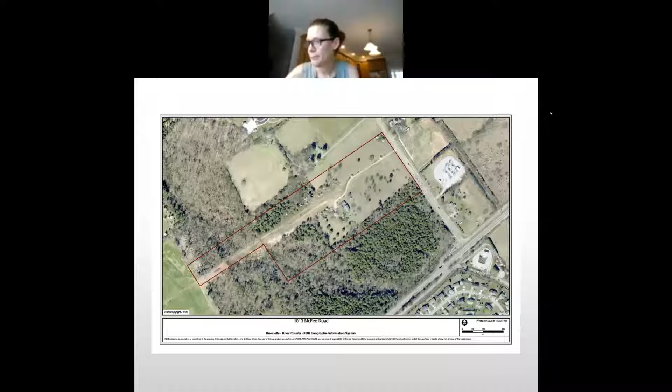Okay, anyone else have anything they want to add? Yeah, who's the developer?

It's a Homestead Land Holding. It's the same people I always work for. The only people I work for. Okay, Russ, thank you. Yeah.

Anyone else? We still have about 15 minutes if anybody has anything else to add at this point.

Mark, I'll just ask, do you anticipate a change in protocol as it relates to the physical planning commission meeting in 2 weeks? Is it still going to be virtual, or how are y'all handling the state and the county current situation regarding that?

Yeah, I'm not sure, Russ. I'll have to check on that. I don't know the answer to that at this point.

Okay. Hey, Russ, this is David Smoke. I think we just got some information that the governor may be extending his executive order to allow us to do virtual meetings a little while longer, especially since the county has still a rule in place through the end of the month to not have more than 10 people meet at a time. So I think if he extends that order, we most likely would have a virtual meeting again. However, if he doesn't, then we'll have to figure out what to do. So hopefully by next week, we'll get some guidance on that.

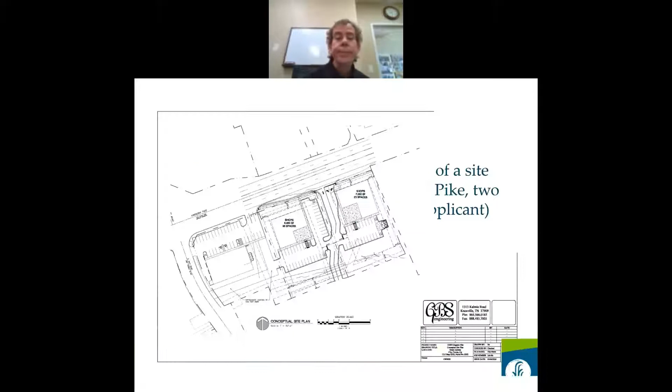Okay, let's go ahead and get started on this item. This is basically a request to, first of all, if anybody is on, please mute yourself unless you need to say something, then unmute yourself so we don't get feedback.

This property is just east of South Watt Road, Kingston Pike, east of the Dixie Lee Liquor Store, and just north of the Icearium. The applicants basically want to get some very preliminary feedback on a rough concept of two 1-acre Waller properties that they're looking to develop into a couple of small shop buildings, retail or office.

The particular request you see on the screen—a couple of things, and we've met with the applicant about this just to go over some of staff's thoughts. If the access ends up where they're proposing it, they will have to request a variance from the driveways and other access ways ordinance, due to the proposed access not being more than 400 feet from other access points on Kingston Pike.

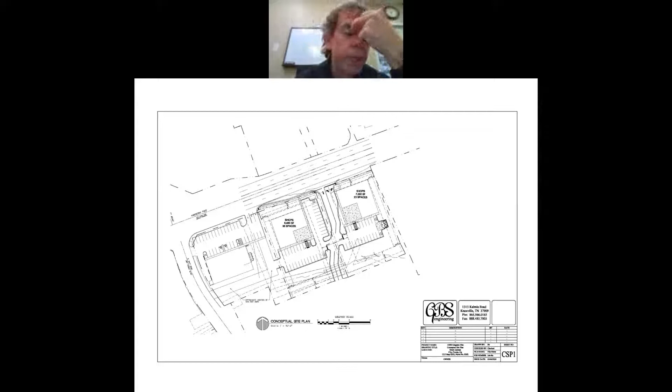So I'm trying to think if there's any other, some of the area around Dixie Lee Liquor is going to be reworked with the TDOT project. There's kind of a drainage swale just to the south of that building that'll be reworked, and the access way is going to be reworked. They're actually going to get rid of the existing curb cut onto South Watt Road on the north side of the Dixie Lee Liquor building, so that should improve that situation since it's so close to that intersection. It's not really an ideal place for an access.

I think that's the main discussion items, at least from staff's perspective. Obviously, we'd want to see sidewalk connections to all the properties to the south, east and west, and they do have a sidewalk shown along Kingston Pike that will connect to a sidewalk built as part of the TDOT project there at the intersection.

And so with that, does anybody have any initial thoughts here on this concept? The buildings are obviously up closer to the street, similar to what we see in some of the other developments to the east in the Renaissance area, for example.

Yeah, if anybody has any questions or comments, now's the time to bring them up. I think the applicants just want to get as much input as they can as early as possible, so they know what they need to be considering when this eventually goes to the planning commission.

Mark, it looks like that access point seems to be across the street from a potential access point of the property on the other side. Is that correct, Nick? Yes, that is correct.

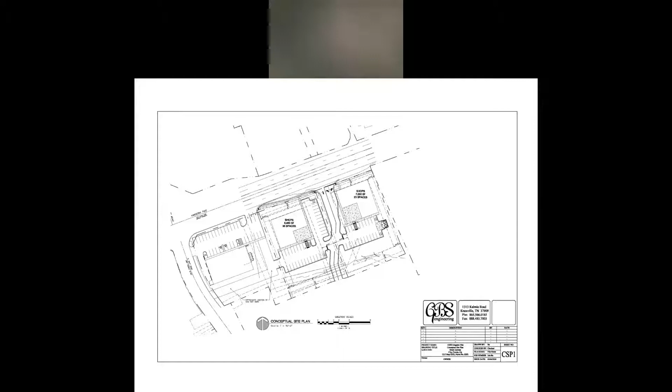Well, I think it's a smart move to line it with the property across the street. That's my opinion, that makes sense. I mean, that's why we did it. It just makes sense long term.

Nick, have you guys coordinated with Dixie Lee as well to have access to the rear of their parking lot? I don't know if they're going to be able to — they're not going to put parking back there, are they? No, and that's a very unique situation. But to answer your question directly, absolutely, we have a very good relationship with the Taylors. We have a very good relationship with the Wallers, who own the ground that Dixie Liquor is on. Now, what is very unique is that it's neither the property owner or the tenant that is making the improvement.

Mark, you're going to know a lot more about it than I, and maybe Daryl's on this call and he can explain it. But it's rather unique that the public sector is actually making the improvement on private property. It makes sense, it needs to be done. Again, it's one of those things nobody would have built it like that today, but that's the way it is.

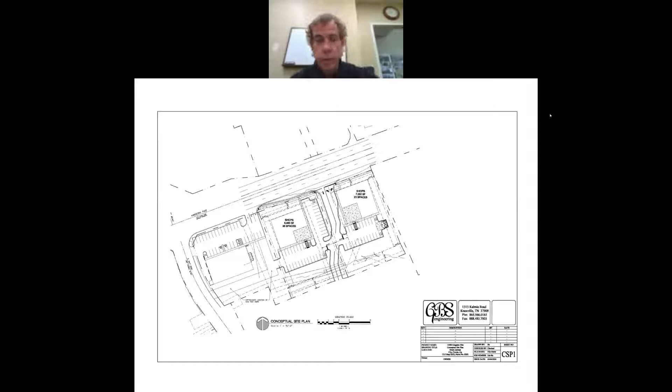Does anybody else have any comments, thoughts, or feedback at this point? This will just be workshopped at the May 21st meeting, but I just wanted to get some early feedback to see if it's doable, what they're proposing.

I do have something I would really like some feedback on, and Mark addressed it a little bit in the introduction. As you can see, we put a dumpster pad on the east end of the Eastern Building parking lot, and we totally support and agree it makes sense to have as much cross connectivity as you possibly can.

In this case, we did put the dumpster pad in a location that would, at least for now, restrict cross connectivity. The reason we chose that location is if you simply go out to the site and stand where you think the dumpster is going to be, which is pretty easy to do, you can see that to the east of us the topography probably falls 30 feet.

So what we're asking, what we would like to ask Planning Commission for, is to allow us to put the dumpster pad there today, and we will include a note, or however you guys want to do it, to make you feel comfortable that if the property next to us — or I should say when it is developed — we will use that as a cross connectivity location. But we think that is a very, very long time away.

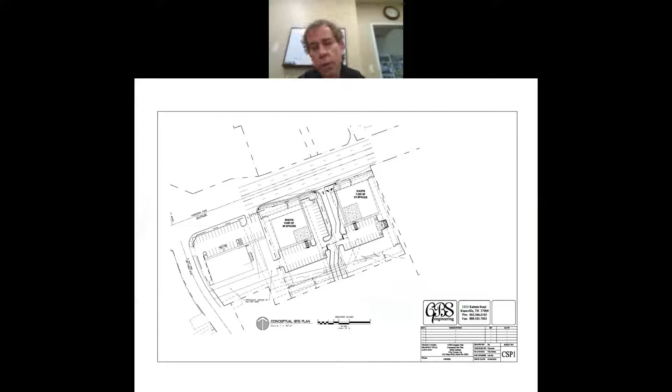Yeah, that's a good point, and certainly that would be an option to look at if Horn's property is developed. At this point with their project, it's more about getting into the design, but basically what I'd say with their concept is set it up so it doesn't preclude a connection from potentially happening at some future date, given whatever may happen to the property to the east. So we'd be looking at access easements that would be platted to the east, and actually to the west with the Dixie Liquor property, and I guess to the south too - cross-access private easements. But they just need to make sure they don't preclude that connection from happening, should all the conditions become favorable. But certainly the Icearium is another option - I would definitely look at that. I don't know what the challenges would be connecting the Horn property south to the Icearium property, but that's certainly something we could look at as well.

Nick, is the topography better at that point than connecting yours? Well, yes and no, probably, Ron. I haven't specifically spent time looking at the Icearium property connecting to Horns because we don't control either of those. So I don't know - none of them are going to be easy. They're all going to be expensive.

Hey Nick, I've got an idea. Since this is a workshop, Mark, can you go back to the drawing? As you turn in between those two properties and start back, you dogleg there to the west a little bit, right there at the corner of the east property - there's a little nook where it turns.

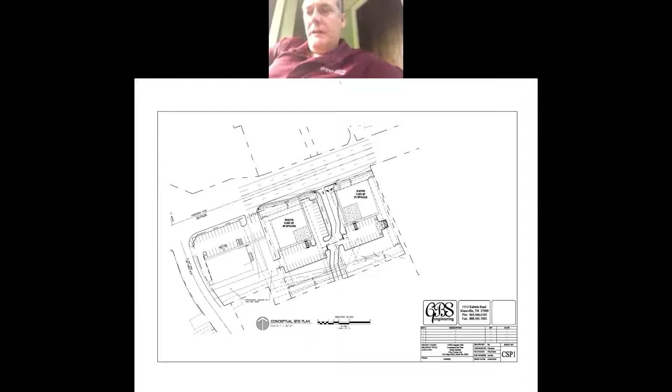If I can chime in, the rationale for putting it at the end of the parking lot is that when the trash truck is emptying the dumpster, he's not blocking the flow of traffic. The alternative location that I think Nick and Ron are talking about - the only downside is that when the trash truck is actually there servicing the dumpster, he's going to be blocking that drive that connects Kingston Pike back to the Cool Sports Icearium.

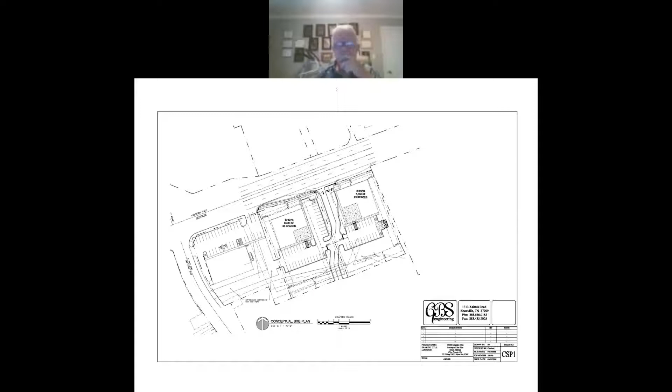I don't know if it's me, but I've lost the exhibit—I'm getting Trevor's photo instead. Am I the only one? It may be operator error here. I think that was me, I was trying to upload or send something. There we go—no, sorry. It just popped up. Okay, Nick, you had a drawing on something there with a little red section off the main drive. Is that where you guys are? You were able to see that? I couldn't tell if you could see it. Yeah, we can see it. Is that what you were proposing? Did you all see that before it disappeared? Yeah, I saw it. Can you go back, Nick, see if you can make that—are you doing that, or is Mark able to? I did that, but I honestly don't know how. It had a little note that said Nick is sharing content, and it showed a little red right off of the main road.

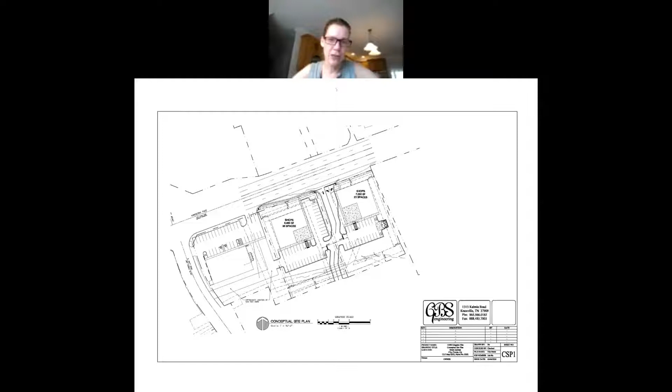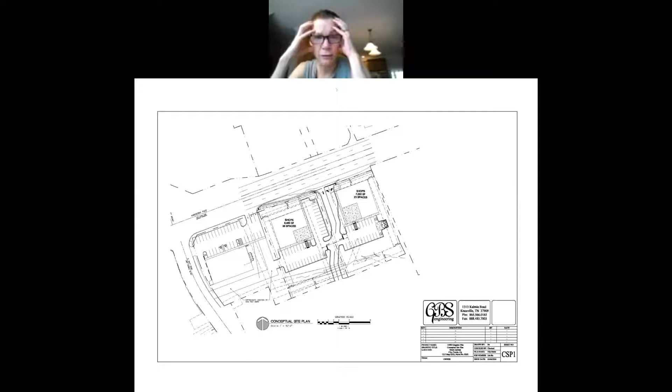So here's the question—typically I don't know when garbage people show up, whenever they want, but that's not what they're supposed to do. Here's the issue: you're in the main driveway there. You might disturb some people that park in that lot, but you're getting out of the main road when you put it in the corner where you have it placed right now. It looks kind of awkward for a garbage truck to get into that, unload it, and then back around and turn around. I think you're in a better position where you currently have it.

We do too. We went through—go ahead, Nick. I was just going to agree, obviously before we submit anything or let anybody else look at it, we go through revision after revision after revision, and we think that where we have proposed it, what you're looking at now, is the best alternative given the constraints that we have. I'm actually fine with this.

The cross-connection easement will be platted so that we're aware that in the future, if something happens on the Horn property, we can revisit locations.

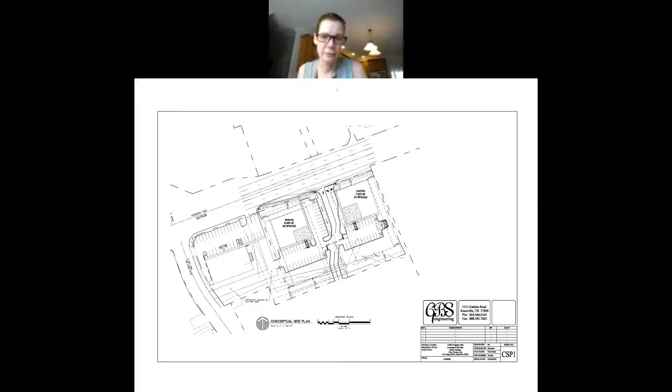By then we may have a new way of handling garbage, who knows. So I'm fine with how you guys have it situated right now. Dixie Liquor has their own dumpster enclosure on the west end. If Horn develops his, maybe this becomes a private partnership where we build one dumpster enclosure that accommodates a larger area instead of every site having its own. None of that takes place until that property is developed, and obviously we've got to deal with trash in the interim. So that's kind of why we proposed it the way we did.

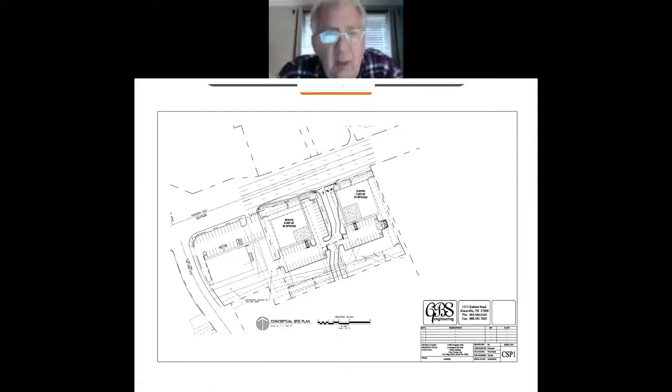This is Alderman Pinchok again. I've got a question, I can't read it, the printing is too small. What's the square footage of these two buildings, and will they be single tenants? Right now, the one on the west is 6,400 square feet. The one on the east is 7,000 square feet, somewhere close to that.

As far as the tenant makeup goes, your guess is as good as mine. I had a large office tenant tell me yesterday that half his staff is working from home and they're more productive than they've ever been. I took that as a shot over the bow that he's going to cut his space in half. If there's anything we've learned in the last month, it's that we don't have any idea what the future holds.

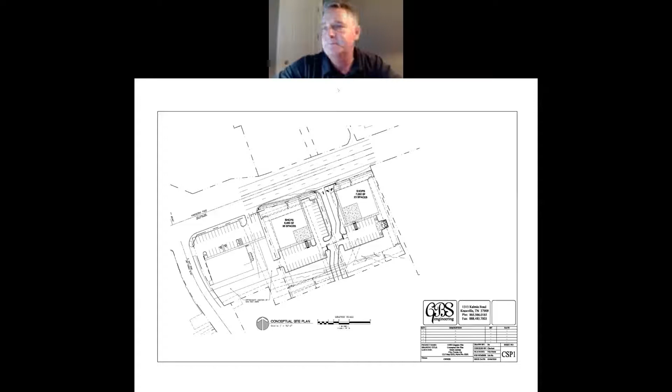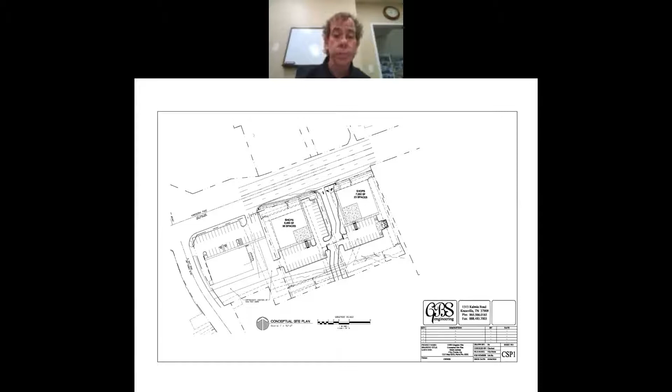Brandon is in on that. This item, if you remember a couple months ago, three months ago, there was some 5G fiber installation that came through the Planning Commission, not the small cell support structures, but the fiber, mostly underground fiber to support potentially those kinds of structures. Some areas were approved, and then the applicant subsequently wanted to come back and present some additional areas in generally the same portion of town, that North Campbell Station, Sonia, Heron Road portion of town.

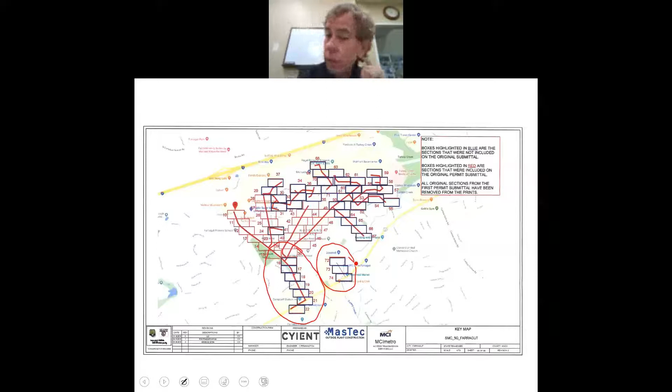What they're requesting at this time, it's a little hard to see on this map, but I'm going to use this marker and highlight the areas in red. The area I'm circling is North Campbell Station, from basically Snyder south to Kingston Pike, and then down Kingston Pike west in front of the Campbell Station Inn property and just west of that. Then West End Avenue is the second area. Then we have two primarily residential areas: Sweetbriar subdivision off of Heron Road, and Stonecrest and part of the Cove at Turkey Creek, off of Snyder, Orrin, and Admiral, those streets in that general area.

So let me get my eraser out. Wait, and then you have to pull it up again and hit pen again to close it. I need to erase it though? Oh, you can just erase everything if you want. Yeah, okay, erase all. Sorry, I'm experimenting with this.

Generally that's the three areas that they're looking to expand the fiber installation. As you all probably know, there've been some challenges with the installation, some utilities that have been hit, and some cleanup that's been needed in different areas where they've been working in the past.

So some things that the staff is going to comment on dealing with this project: the first thing is we have limited staff and we don't have the ability to be on site all the time with not just this group, MasTec, but any other utilities, to monitor what they're doing. So one thing we will be recommending for this and any future linear projects like this is that they break it up into smaller sections that are more manageable for the staff, treated separately through individual right-of-way permits. We'd issue a right-of-way permit for one section.

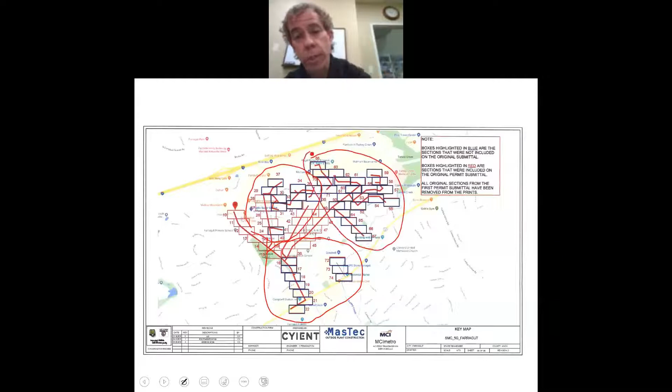You've got the more non-residential part, which would be North Campbell Station, a small portion of Kingston Pike, and West End Avenue. That could be one phase, and which phase they want to work on first is up to the applicant. Then the Heron Road Sweetbriar phase could be another phase, and the third would be the Stonecrest, Admiral Road, Cove at Turkey Creek phase. That way it's more manageable, and we don't have our staff trying to figure out who's doing what where, and it's kind of all over the place. It just keeps it more centralized.

And then we can also make sure that in that particular phase, if they've got anything that was damaged or needs to be fixed, or issues where maybe it's not stabilized, smoothed down and stabilized, those kinds of things get taken care of before we let them start on the next phase.

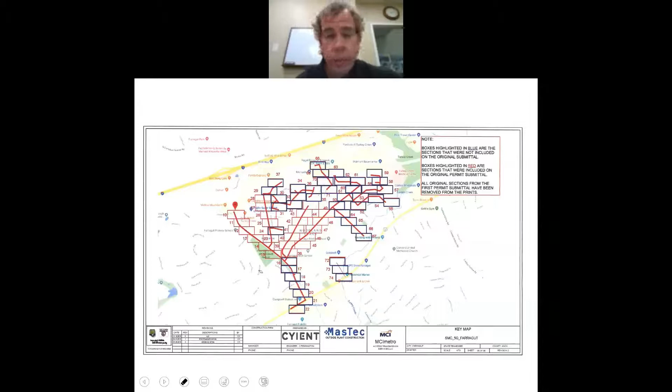And this would be for really any utility projects, because these utilities, especially in developed areas, can sometimes have a significant impact on property owners. So we just want to make sure we work with them and minimize that impact to the greatest extent possible. Some other things we'd be looking at are more coordination with existing utilities, maybe developing a potholing plan for where they're going to be potholing to assess where they may be crossing other utilities, so that again we're trying to minimize the damage that might occur otherwise.

So that's kind of some procedural observations. This particular set of drawings, I didn't include all 62 pages in the PowerPoint. I just basically included this master sheet showing you the general areas that they're looking at. One of the things I'd note, some of these areas have existing overhead utility lines. A question I would have would be, can any of those overhead utility systems be used for this fiber installation?

Another thing would be, as you all know, the Campbell Station Inn—the town has spent a lot of time and money on that property, and they are showing a 2-inch conduit through that section, and also in front of the outdoor classroom. We just want to make sure that area has particularly close attention, especially the Campbell Station Inn. There's just not a lot of space to work with, and we certainly don't want any damage to that property.

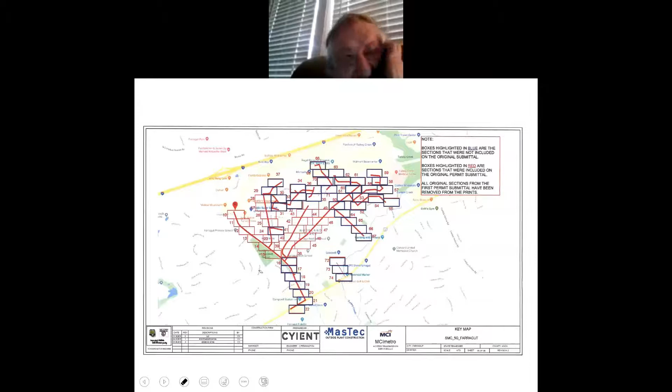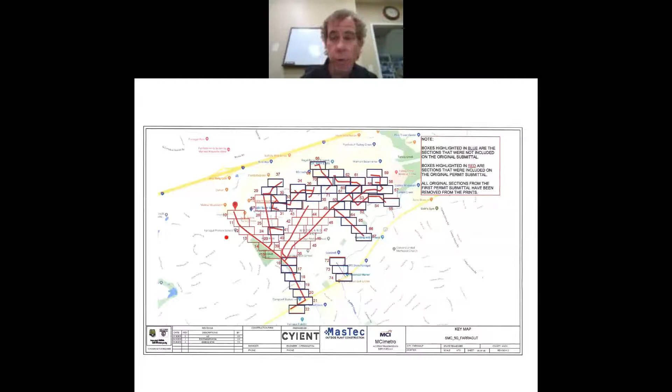There's some language in these plan sheets that talks about tower type and tower locations. It needs to be clear that this is a request for fiber installation only. This project does not mean or imply that we're approving any tower locations. Those will have to be looked at as a separate review and application process.

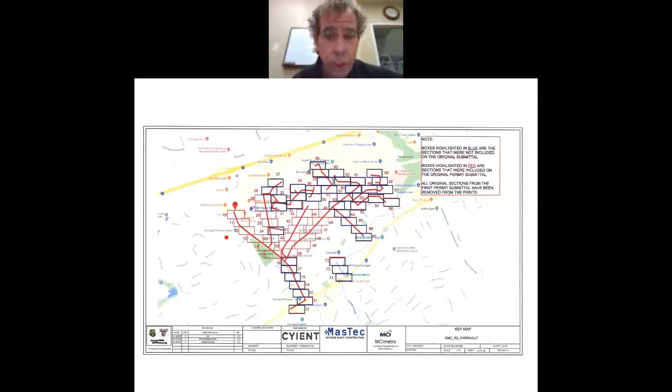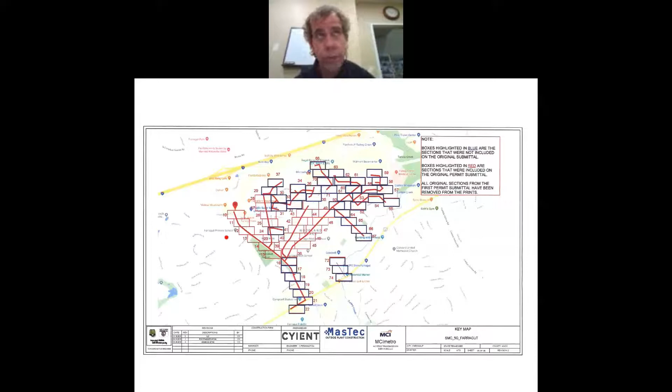It looked to me, from some of the language I saw, there's about 19 small cell tower sites that I counted in different locations in this new area. Where they're showing some handholes, potentially a tower might be envisioned, but that may or may not be where it would need to go to minimize impact to adjacent property. Certainly, the first thing we would always look at is using overhead utility systems.

If that's not available, and you do have to put a new pole out there, the placement is very important. You don't want to stick it right in the middle of someone's front yard. You want to look at side property lines and try to keep it close to those, put it in the most discreet location possible.

Those kinds of considerations would be something that we would look at as part of the review of the small cell support structure plan, which is completely separate from this, although they're obviously interrelated. At this point, does anyone have any questions?

I have some questions that one of the citizens had sent me, and I can go over those later. But does anybody else on the call have any questions at this point?

Mark, just for clarity, because I see these handhole vaults - do they come in various sizes? I know I've seen on the symbol page they have an extra small, a small, and a large, and then what's called the handhole vault. Are these vaults all handhole vaults? Are they all varying sizes depending upon use? I'm looking for clarity on what all those vaults are.

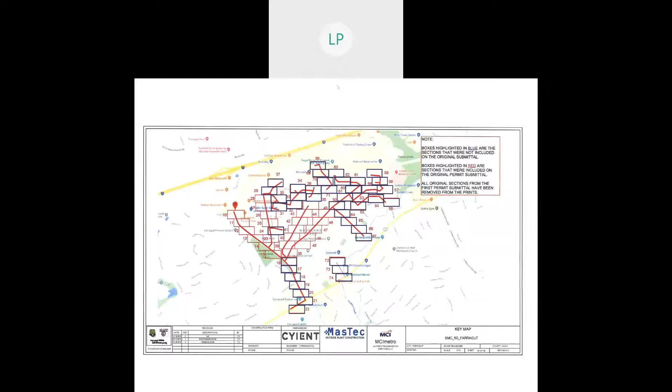Our intention is not to damage things of that nature. If we have to pass by or near that, we would venture to go underneath it at a significant distance where it wouldn't affect roots. The method of placement is designed to create as little above ground effect as possible. We have no interest in damaging people's flower beds, shrubbery beds, or things of that nature. If we were going to set something like that, we're trying to do it at a property line, a place that would be less obtrusive. The last thing we want to do is affect people's yards.

I live in a yard myself, so I'm totally on board with that. And Mickey, this is Mayor Williams.

We've had a tremendous amount of concern about damaging trees. There's a big rumor out there that somebody was going to cut down all the trees from your group, and we seriously hope that was very false. My question is, how deep can you bore in order to hit or miss, preferably, the roots, the large root sections on the large oaks and trees of that nature?

We can bore very deep. A lot of times, if we're on a highway or a main thoroughfare, we try not to get too deep, because sometimes we have to get back to access that conduit again for a future extension or customer need. In these subdivisions, we're trying to have all that squared away based on plans showing the approximate locations of where the small cells would ultimately go, or be applied for with you guys. So there's not really a need to worry about going back in to dig up and access the conduit. If we place the handholes in strategic places, it'll be a one-time thing.

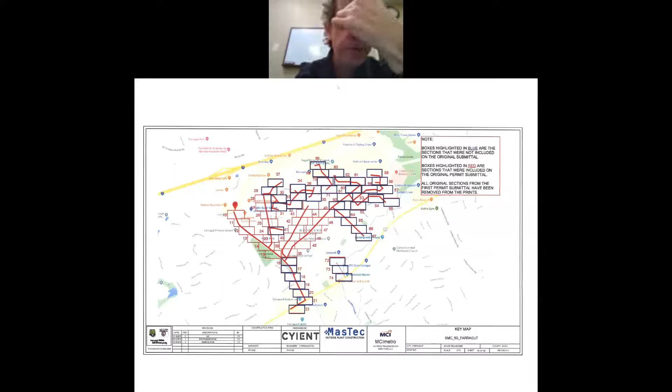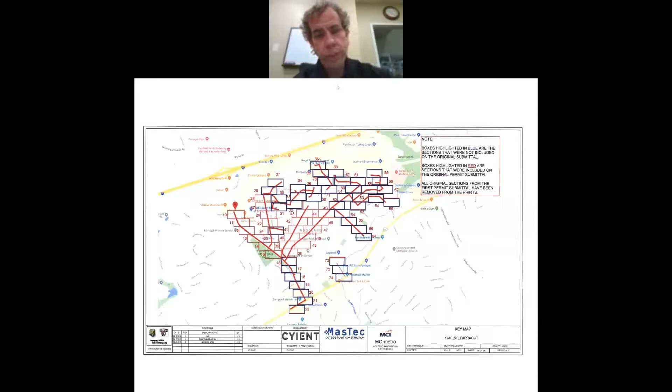Is there a correlation between where a handhole is shown on the fiber plans and the likely location of a small cell support structure, or is it not particularly connected? In other words, just because you show a handhole coming in a certain spot, let's say it shows up on these fiber plans in the middle of somebody's yard in the right of way, that doesn't necessarily mean that should there be a tower added somewhere, it couldn't be on the side property line. Is that right?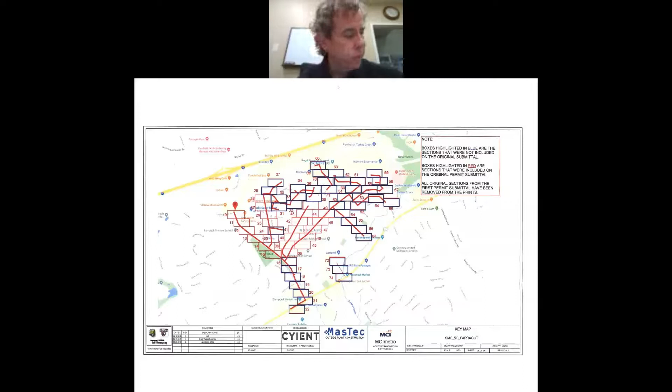I would say that's true, but I'm not really in that part of it. I don't know. If the tower folks, Tower Source, would be doing the design on that, they have to take into consideration different things than I have to do. They're just showing me some potential sites.

So we have handholds maybe at a street corner where we're having to go two ways. We'll have handholds. If it's too long of a run, we may drop one in the middle there somewhere to be able to have as a pull. And the rest of them are supposedly where there's an approximate site being shown.

They like for us to try to get within 5 feet of where the small cell site would be. But when you're doing that on preliminary designs, some of those may not show up at the exact same location that they end up wanting them at. But that's why we may be trying to get close to them.

If you have something in particular, I can go back and look. I don't think we want to try to set any of them in the middle of someone's property. It would need to be somewhere near a property line as close as we could.

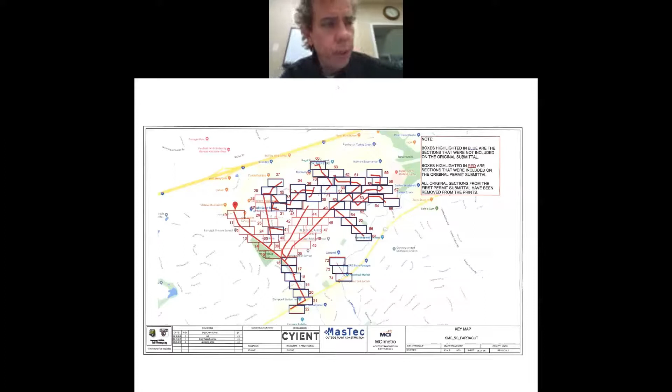Well, we can go back and look at those if you've got some. There were some handholds that did appear to be not anywhere close to the side property line, and I think that needs to be thought about, because when the actual tower request comes before the planning commission, we're gonna put them in an area that is the minimum impact on the property owner. Normally, it's going to be to the side of their lot line.

I will take it on as an action item then to investigate those. Do you think, Mickey, you would be ready for anything on the 21st with going back to look at overhead utility options, or?

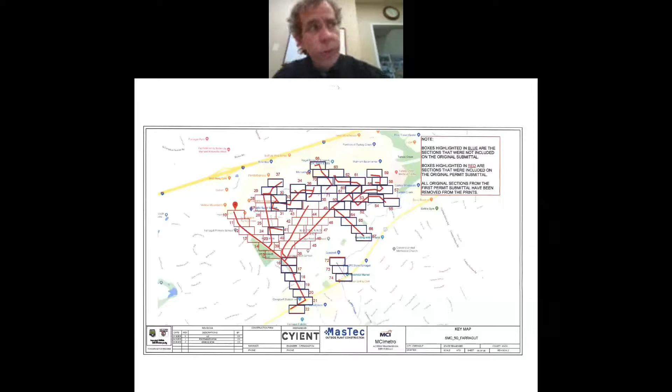We'll make sure of it. I don't see any problem with that. We can do that. We'll need to have your revised information by the end of day next Monday. So just if you can check that quick, because there's a fair number of overhead utilities in these areas.

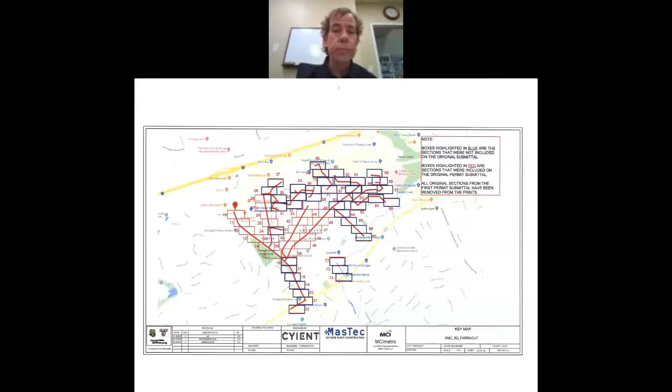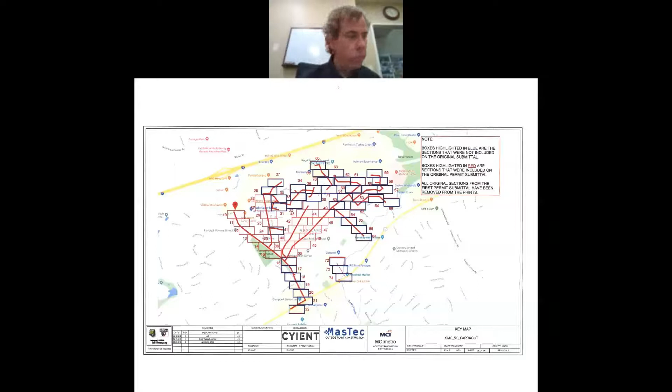So anywhere those can be used, I think would be preferable for the property owners. That way you're not disturbing their yards in the right of way. Sure, I will effort to make sure we get that done and have it to you before next Monday.

Okay, Mark, I have a quick question. Mickey, you guys had with the first approval, you had a schedule like 6 phases, if I recall correctly. Where do these phases fit into those phases?

Well, the original part, if you're looking at the sketch here, the parts that he circled that have like a blue square—and yeah, I'm a little bit colorblind, so if I say the wrong color, forgive me—but the parts that are not included in the blue square, we submitted them initially because that's all we knew. And shortly after we submitted it and got it approved, they came back, MCI came back with some additional possible locations. And I'm like, I wish we could have done this the first time.

So this is to try to, we're in the neighborhood. I hate to go back again 6 months from now after you clean everything up and start again. So I wanted to try to say, let's get this done, get it all done at one time for this area. The other 5 areas were fiber for different purposes. Basically this was our first phase and we're still working on that. We're not even started on any of the others yet.

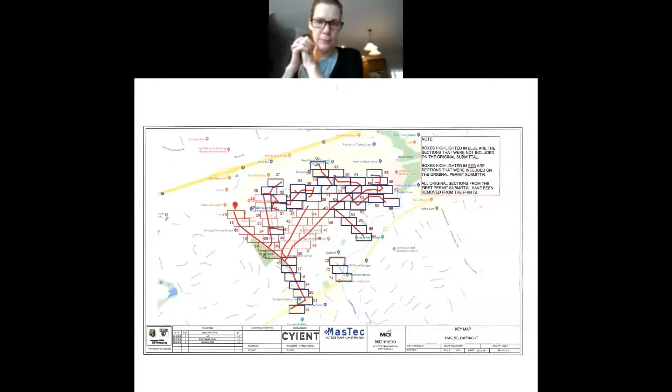Okay, so this is going to be added into that first phase then, is what you're saying? Yes, it would be. So it's still going to be permitted separately. Permits that we were talking about, and we'll come up with some specific dates on them too. But some of that, I think our first phase we were talking about doing in January, so we're clearly not on target with that at this point. It's taken a lot longer than we thought, but we haven't gone back and done any of the others. But what I'll do is when I get some dates for these, we'll come up with some estimated dates and I'll resubmit that schedule and we'll add these other parts on so that they would come behind this.

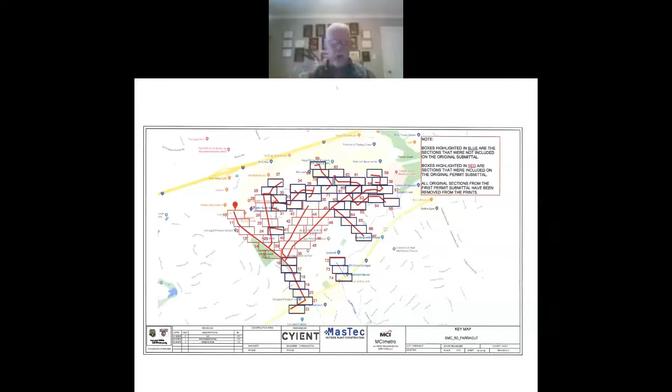Mayor Williams: One suggestion that I would have that I think the residents would be very thankful of is whenever you go into the neighborhoods, try to do that to where it's in the grass growing season. If you do it in the middle of the summer, it's kind of tough to get grass started and going across somebody's yard in a spot that you potholed or anything else for that matter. So this is in areas where you cannot go overhead, okay?

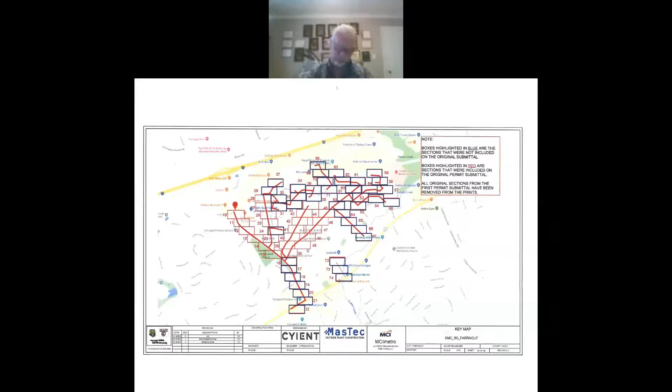Yes, sir. Well, that'll be another benefit to the fact that we're already working on this other part. Hopefully by the time we've got the first permit approved from this new part, they'll be just about ready to start that. So it should be something we can go ahead and get this wrapped up and get out of everybody's way.

Does anyone else have any questions or comments? I've got a few questions from a resident, but I can get to those in a minute. Does anybody else have any questions?

I think the bottom line is we're kind of learning with the utilities, and what seems to be more manageable for us. I think going forward, if we can have these kind of procedures that we've been talking about in place, I think it's going to help a lot, make things more manageable and more organized.

I had some questions, just Nikki, again, some of these may not be anything you can answer and probably wouldn't be able to. Do you know if there is a plan from the provider for the total number of antennas? Yeah, I don't really have that information.

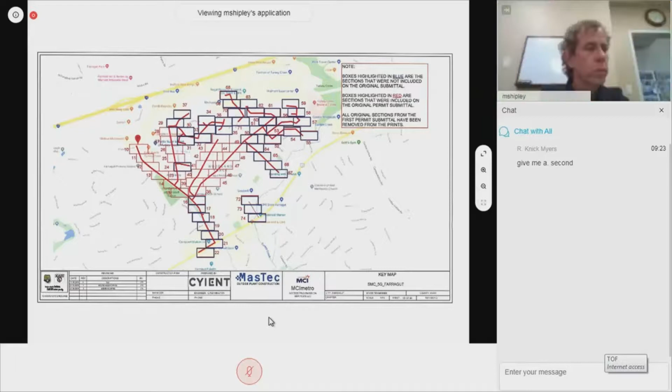We're going to take a look at it and see what we've got. Okay.

All your vaults are going to be underground, I assume - I mean, that's kind of an implication of a vault. Yes, the ones in the residential areas will be the size that's on the legend, I think it's 17 by 30 by 18. Is that generally what you'd be looking at? So apparently on sheet 81 there's a vault detail showing one up to 76 by 42. Let me pull that up - I've got it separately, I'm not looking at you guys right now. I had to go jump into that.

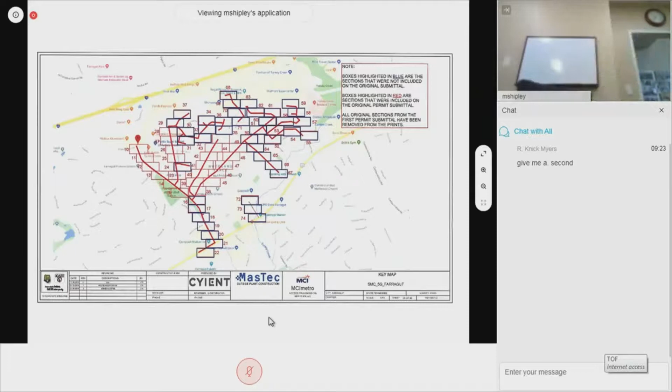Oh, you're talking about that little detail thing. Yeah, that's more of a model - I think I may have spoken incorrectly. It's 30 by 24, I think, but 30 by 17 is your smallest one, and the depth is 24 inches, not 18. Right, I forgot we had this on there. So pretty much any vaults in residential are going to be the smallest one on the legend sheet. If it's out on Campbell Station or somewhere, there may be something a little bigger than that.

What we've got is some places where we actually have to put like a cross-connect kind of thing inside, but that's for a different technology, doesn't have anything to do with any of this. Okay, I think that's all I have on that. Does anybody else have any questions for Mickey?

Obviously - oh yeah, yes, mm-hmm. This is Ed St. Clair. Yes sir. I don't know if they can answer this, but what's the next targeted area for installation in the town?

This is all we've been given up to now. We're a vendor that works for MCI Metro Fiber, and this is all we've been given by them to design up to this time. We don't have any other design work in Farragut at this time, and may not get any more. I don't know, but that's where we stand at this point - this is all we have. Understand, thank you. You're welcome.

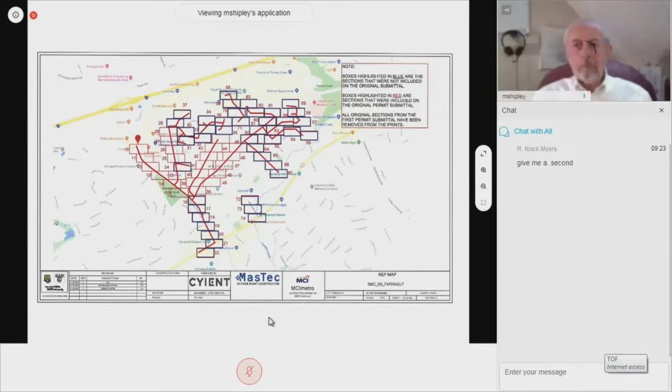In certain cases it's less than that, like at the bottom of a transformer, for example. It's hanging below the neutral, so we have 30 inches we can get below that. As long as the transformer is in the right place, and street lights too, you have to consider that. But in general, it's 40 inches below the neutral line, the bottom conductor for the power. We have to stay below that, and we have to stay at least 12 inches above whoever the highest communication line is.

Okay, thank you. You're welcome. Anybody else have any questions or input you'd like to provide at this point?

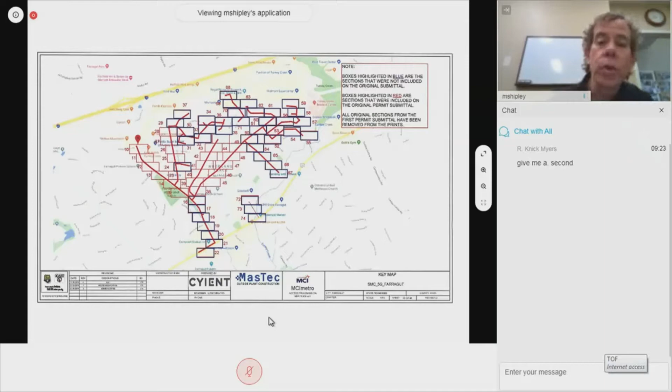Okay, well, let's go ahead and get started on the last item on the staff developer agenda for today. This is a continuation of some discussion we had at the last staff developer and planning commission meeting dealing with the redevelopment of the old Kroger property and some property that surrounds that area.

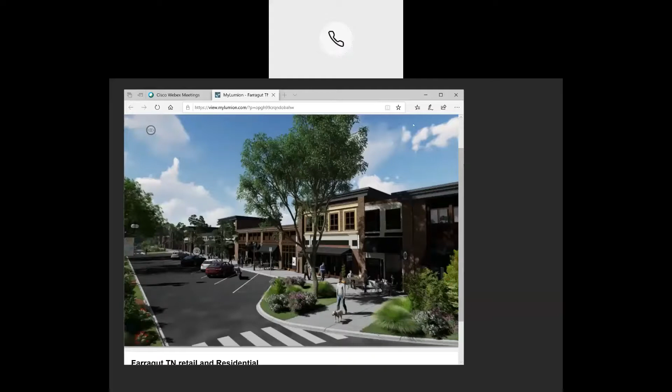That sounds good. Yesterday I received some updated renderings of the project area. I'll just kind of go through these a little bit. This gives you some more context on the larger part of the development and how the larger commercial buildings to the south fit in. We'll just scroll through these first.

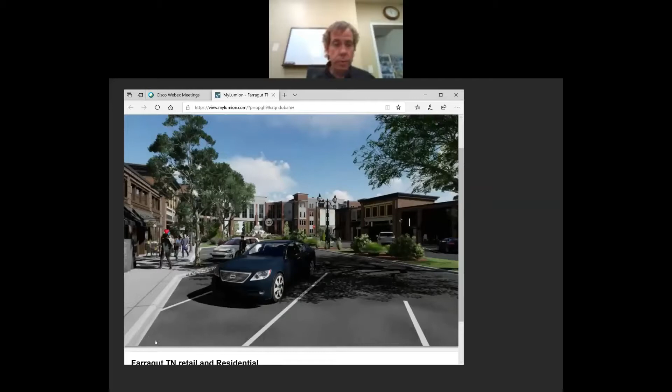That's getting back to the south part of the property. This is the larger commercial building. We had an earlier image that was more modern looking. This is their revised building elevation for that.

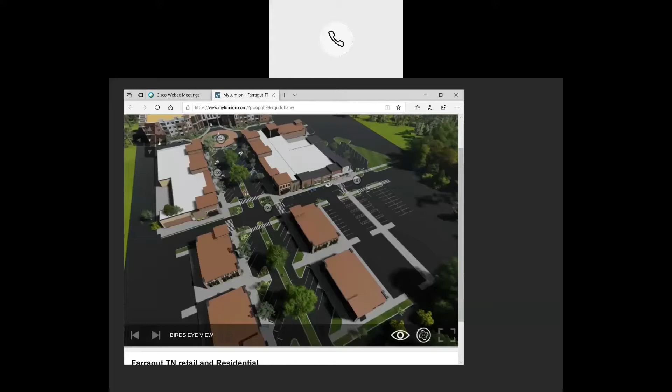Hey, Mark, I'm sorry to interrupt. Yes, sir. You can spin those 360 degrees with your mouse, or if you're using an iPad, you can use your finger. Okay. I'll do it in a second. I believe I can. Yeah, there we go.

Okay, yeah, this is kind of a bird's eye view of the project, at least the portion they've looked at so far. Closest to the bottom of the screen is the north part of the property, closer to Kingston Pike. We'll scroll around here, it's a little bit, make everybody sick. Basically, right here we're entering the main street from Kingston Pike. Then we'll go south into the property, and you can see the larger commercial buildings there before you get to the first multifamily building at the roundabout.

That was one of the things we asked them to do, is try to see how the project fits there with that intersection, or transect, between the commercial and the residential. The smaller footprint commercial closer to Kingston Pike, and then the larger commercial as you work your way south, ultimately to the multifamily portion. Let me see if I've got.

Somebody needs to, yeah. And here's some of the smaller buildings that we looked at more or less last month. Those are pretty much largely unchanged. And then again, the bird's eye view showing how it all fits together.

Does anybody have any question? I think they're still working on getting the concept plan. I know that was something we talked about at the planning commission meeting, to see how the development of the property is going to fit together. Obviously that's very important. They completed the flood study a couple of weeks ago. So I think they're trying to work through what portions of the property are realistically developable, and how that's going to fit in the overall concept of what they're doing.

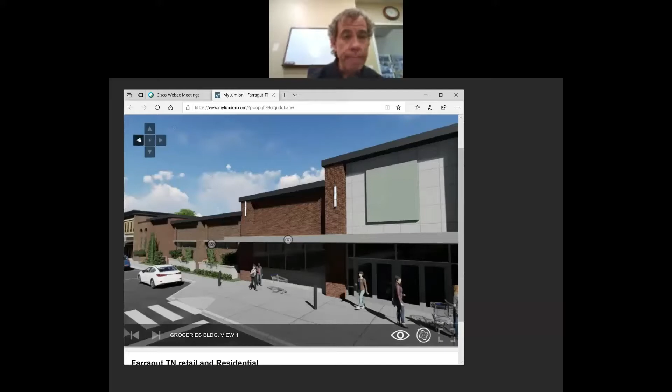Mark, this is Alderman Pinchot. Can I ask a question? Sure. All right, could you put the bird's eye view up, please? Yeah, let's see.

Okay, in the middle of that complex, there's some storefronts that look like they're going to face out towards Kingston Pike. I really like the looks of that. Just wondering if the northern part of this development is going to have any storefronts facing out to Kingston Pike. That really draws the attention of people passing by, and I'd like to see more of that in the northern end.

Want me to answer that, Mark? Yeah, go ahead, that's fine.

Yeah, this is Bud Cullum. Yes, absolutely there are, a couple of 2 or 3 smaller boxes that will be both fronting Kingston Pike and fronting as you turn in. This bird's eye view right here does not show it - we have not rendered yet the 2 or 3 buildings we're planning right as you come in off Kingston Pike.

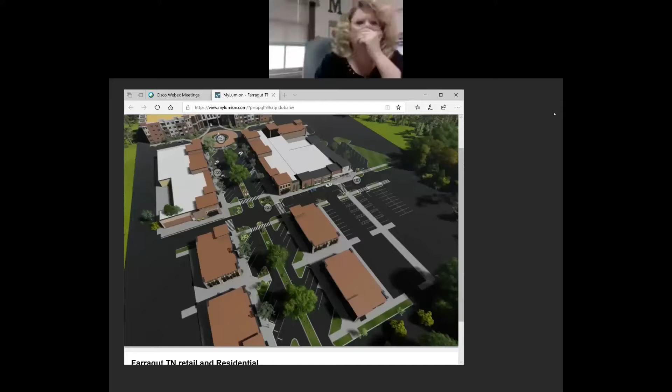As we finish, I'm getting a little bit of feedback there. Can everyone hear me? Yes. Good, Bud, good.

But yes, to answer your question, one other thing I might point out, Mark, that may be helpful is on some of those other angled shots, as you go in there, you can use your mouse and click on the left and start spinning it. As you go in, that's going to give them, it's almost going to feel like you're walking the streets or driving the streets down there. To answer your question, we have not rendered yet in this model the 2 or 3 buildings right out on Kingston Pike, but that will be coming as soon as we finalize this concept master plan that we're working on furiously right now.

Well, this is Bob - do you know whether the schematic plan, the colored bubble diagram plan, was conveyed to Mr. Shipley? No, it has not. Okay, Bob, it has not. Can you hear me? Yes, I can, thank you sir. Yeah, it has not been conveyed yet because we still have some discussion and work to do on it. I want to make sure we're going to show it to them and it's going to change several times, but I wanted to make sure we're getting it accurate. So that has not been conveyed to them yet.

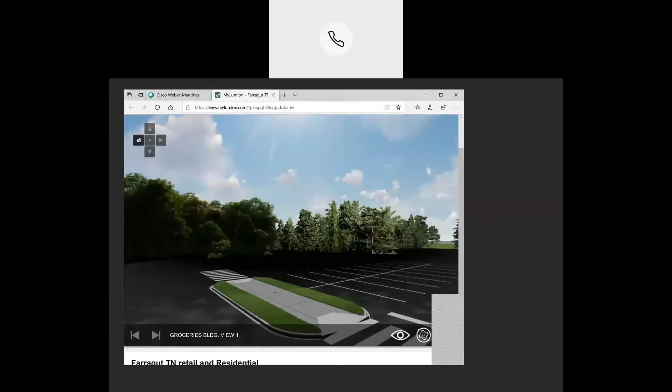So that angle right there would be looking toward - go back a little to your left there, Mark. So that right there, obviously that tree's not going to exist - that's going to be as you approach Brooklawn. Coming in off of the Brooklawn entrance, you would be coming down right in front of this commercial building. Then spinning on around the other way, you can see how it looks, Mark, as you drive further in. Go spin one more time. There you go.

That's the east-west drive that bisects Main Street. Okay Bud, that's coming off Brooklawn, headed east. That is correct, correct.

So then, Mark, if you want to go down to the area from the angle at the roundabout - this is that same intersection of Main Street and the road from Brooklawn. Let's see, I'm trying to figure out which - there's another view if you get there, that view. That's again almost at the roundabout looking back toward Brooklawn. If you spin to the left, you'll see - you're actually at that cross section, the roundabout is further to the south. Yeah, the roundabout, right, you should be looking down - there you go, toward the roundabout. That's correct.

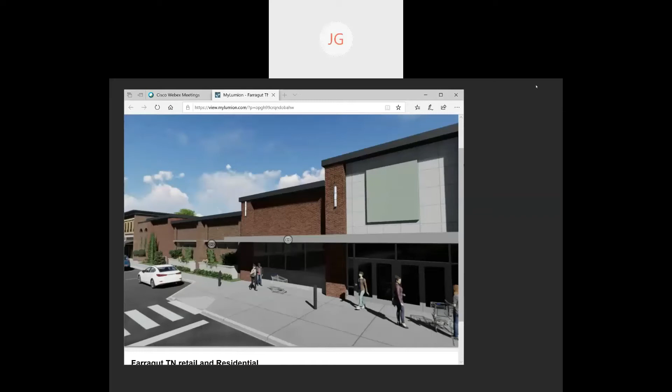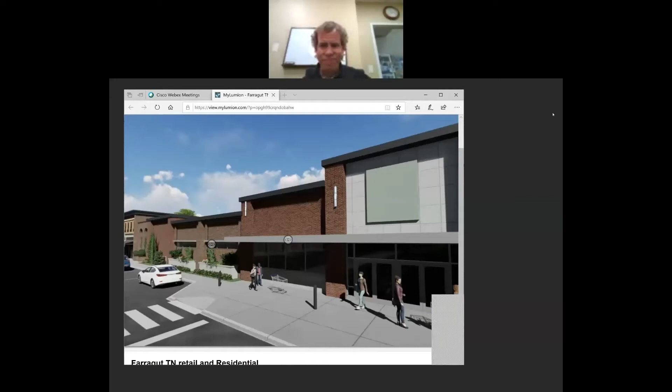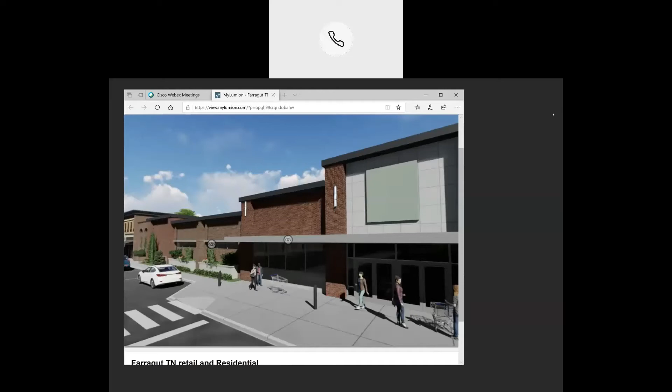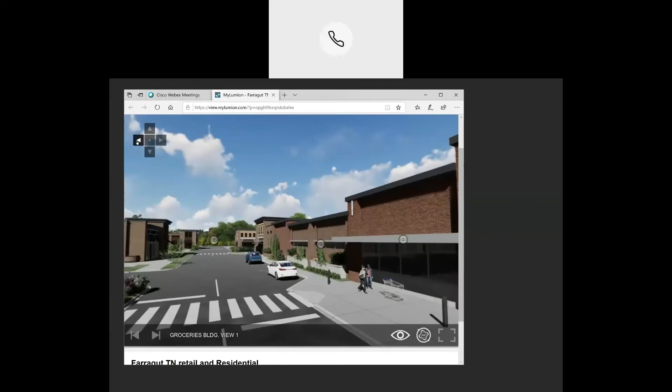Yeah, I would plan for it to be, unless Bud has some additional information as well. It just depends on what they would have ready to share. Our goal would be to have this, all of this, plus some. We're frantically trying to get to the point where we're comfortable showing an overall master plan with park and amenities and multifamily and the whole thing by that meeting, if possible. Hopefully we can get that to you before the meeting so it can be circulated. But everything you're looking at on this screen right now, subject to some potential minor tweaks from the large commercial user, would be what we plan on having at the commission meeting.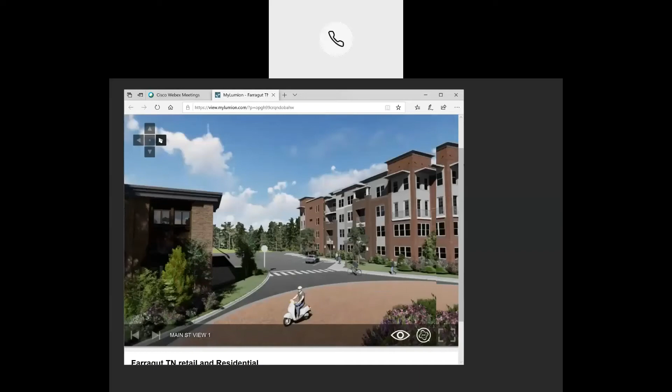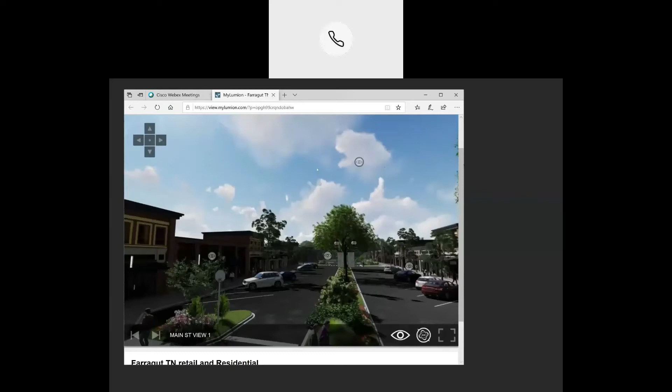Mark, if you can spin that particular one around so you're looking back toward Kingston Pike, I think that's going to give... Bob, I don't know if you can zoom those or not, but that gives a pretty good perspective that you've got a long linear, what we're wanting to call Main Street. And the only thing, as I said earlier, we have not rendered yet is the actual opening onto Kingston Pike.

Would that include, Bud, the iconic building elements that we talked about with the Planning Commission at Kingston Pike? We've got to come up with something for your review and comment on that. Okay.

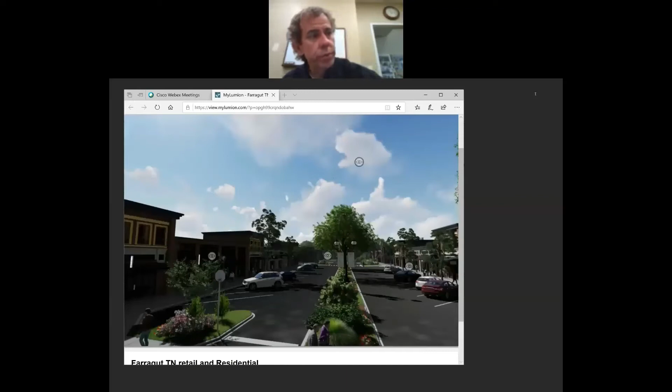Anybody else have any thoughts or feedback on what you're seeing with these updated images? Bud, Mayor Williams, nothing on the back portion of the property yet?

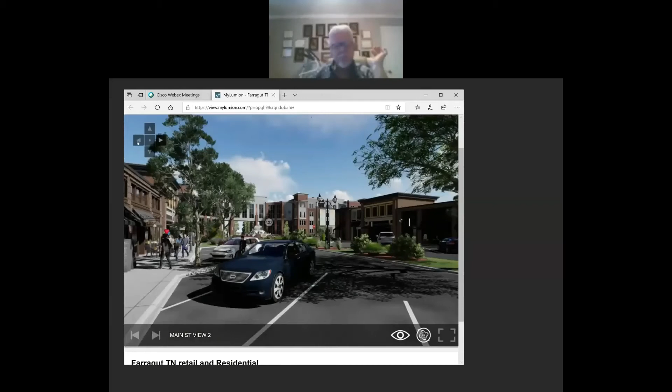On the south end? We're very close. That's what I was kind of referring to earlier on the overall master plan. We have a hand-drawn new rendering based on a lot of comments internally that we went through at the end of last week. That hand drawing just came out yesterday. And that's where, when I was talking to our architect, I wanted to have a little bit more time. It may just be a couple days for us to review and make some potential changes before we submit it to you, because I want to make sure what we submit is as accurate as I can get it.

But that's my goal, to have something from the concept plan for you people to start sinking your teeth into, just in a matter of days, to the point, hopefully, it could be something that could be introduced at the workshop for the commission meeting also.

Thank you, sir. This looks really good. Thank you.

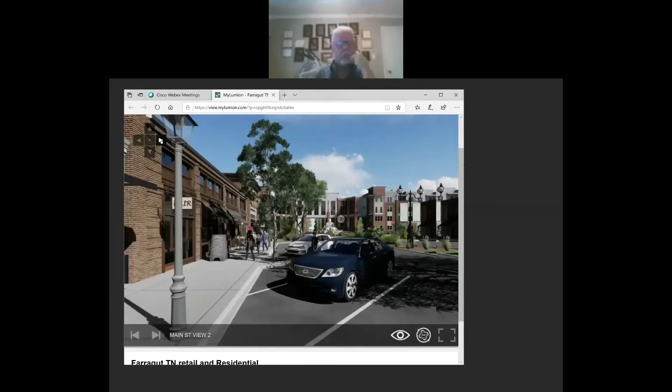Anyone else have any thoughts you want to share? Mark, this is Vice Mayor Pavlin. I think it looks great. I'm looking forward to seeing the concept plan so we can get a better lay of the land with the connectivity. Of course, that's going to be the big concern, getting in and off the property and eventually what that leads to for traffic impact and all that stuff. So we need to be able to see a concept plan. I'm looking forward to that.

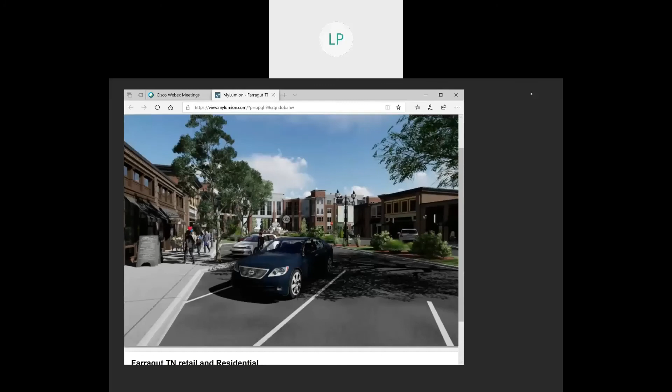Okay, anyone else have anything that comes to mind with what you see so far?

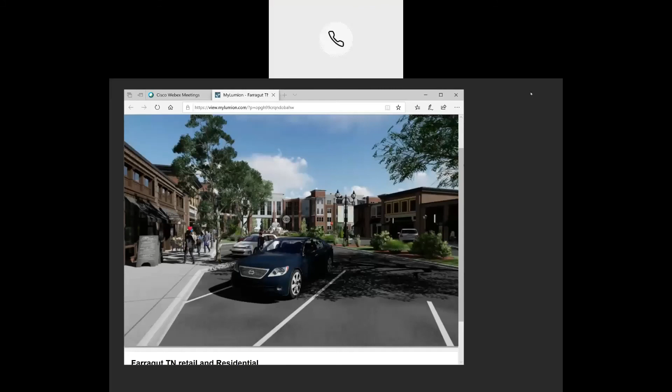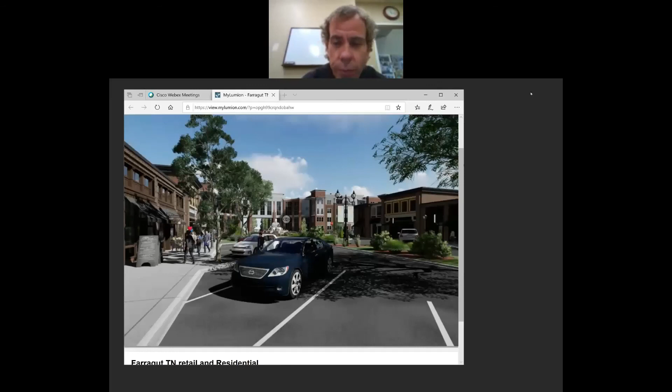Okay, well, thank you, Bud, for sending over these revisions, and we'll take whatever else you provide, and we can show that to the Planning Commission on the 21st. I'm not sure if it'll be in this format or in person. We'll have to see where we're at that point. But anyway, we'll show whatever you're ready for us to look at and give you feedback on.